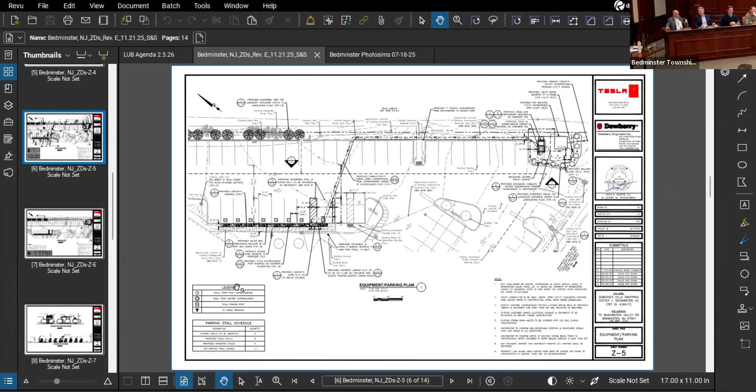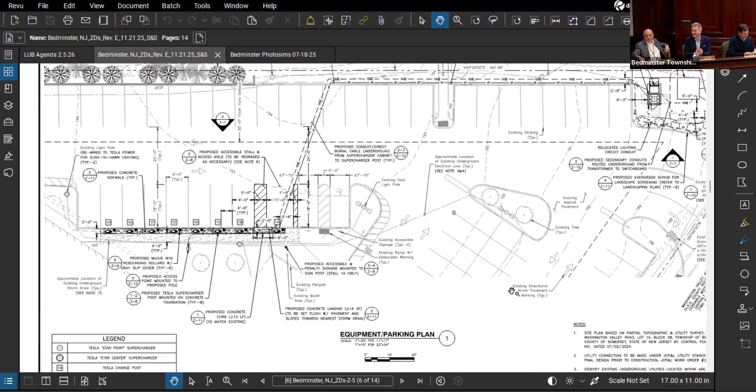So, as mentioned before, Tesla is proposing to install EV chargers and associated electrical equipment at 75. For those of us who forgot our paperwork - you didn't bring your homework. Well, you said you were gonna share with me now. Let those two guys share, I'll make Tim share with me. When you're giving documents, people, please remember where. Especially when you're giving them like a year ago, you're in the file somewhere.

So who's that building? Z5. C5. Yeah, that's exactly right here. We'll get some more, you can share the microphone with someone. No, it'll feedback, he just has to be on mute. So we did the other night, we had the same problem the other night. Chief, yes, and with Amanda. Could he type in? No, we're just gonna call him on a cell phone and put it next to a microphone so we can hear him if he speaks. Sorry about that, all right, go with it. Should we wait until he's on or keep on?

As part of this proposed installation, we will be adding 8 chargers, 1 supercharger cabinet, 1 1600 amp switchboard, and 1 utility transformer. This will be located at the eastern section of the existing lot. The existing site is a shopping center with an asphalt parking lot, and the chargers are proposed in an existing sidewalk area. The proposed cabinets will be in an existing landscaped area along the Knox Ave right-of-way. Additional landscaping will be proposed along the Knox Ave right-of-way to help screen the cabinets. Also, as part of this installation, 2 existing light poles will be modified to adjust their timing from dusk to dawn.

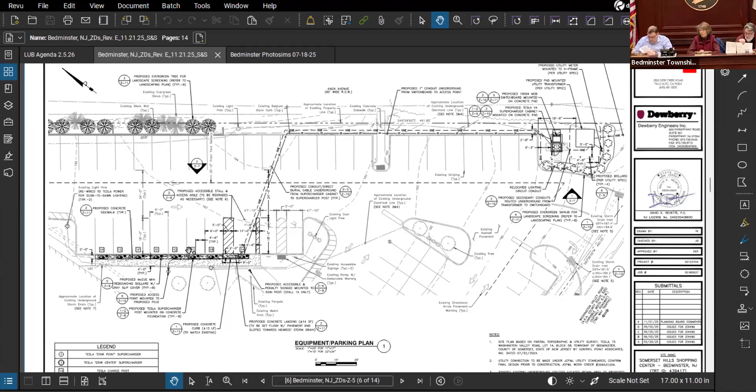Can you explain what additional lighting is going to be added in this area, if any? So there is not any additional lighting. The existing light poles that are there will be modified for their timing to run from dusk to dawn. They go out right now with us. Okay, we're at, to code.

And who would I talk to about any additional landscaping and stuff? Because the cars are going to back in, and on Knox Ave, that's all residential living. Yeah, that path is all residential there. So when they're backing in, the headlights are going to be straight ahead. Now, I know the headlights go off sometimes, unless someone's in there and puts the foot down. Is there going to be anything to prevent those headlights from being seen by those homes? Or do we think the wall's high enough right now? Have you looked into that?

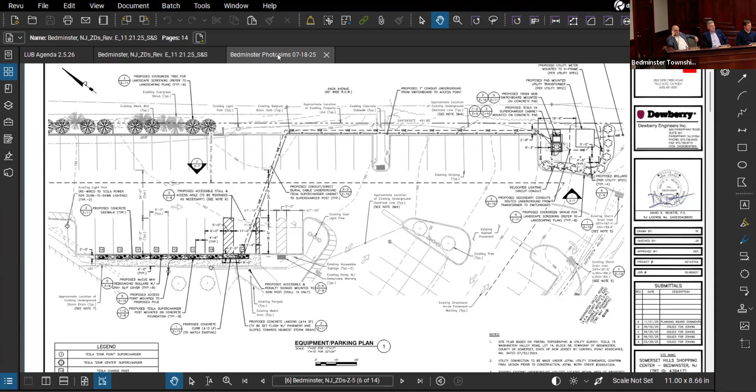Yes, so I'll pull up a photo simulation so you guys can see from when you're at the charger and looking at that wall, to get an idea of the landscaping. So this is our site plan, if you zoom in on part of our application. Yes, this was submitted. Is there any change since the exhibit was presented? No.

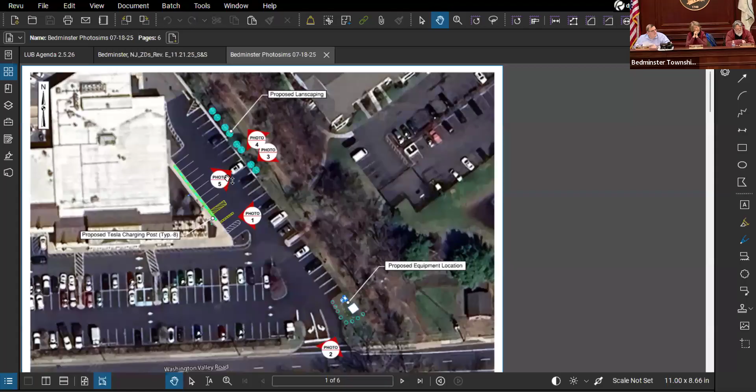So photo 5 would be the direction of your headlights, the way if you backed in and then you're facing Knox Ave. So I'll go to photo 5. This would be your view. So that's the existing retaining wall, and then you can see we're adding additional trees on the top side of that retaining wall. So as you can see right now, it is pretty dense. After you pass Knox Ave, there are additional trees before you even get to that residential area.

Now, will those trees be green all year long, or will they lose leaves? Will this be a shade, a buffer all year long? So the ones that we're planting will be year-round green, they're evergreens. The ones behind look like the ones that are going to lose leaves in the fall. Okay, all right, so it's a constant buffer. Okay, yes. Okay, could I ask a follow-on to that?

Was there any thought given to having the headlight issue point away, using the spaces where the car is right there, as opposed to the ones closer to the building? So it wouldn't necessarily make a huge difference, only because some cars have the charging port on the back and some have it on the front. So not every car would back in, some would pull forward. So if I'm on that side and you pull forward, you're still shooting that way.

I think Tim's point really is dense evergreens are the thing that's going to cut off the headlights. Usually when they're close, something 3 feet high will block headlights, where when the headlights are this far back, you're going to need something bigger to make a difference further away. But we'll work on that.

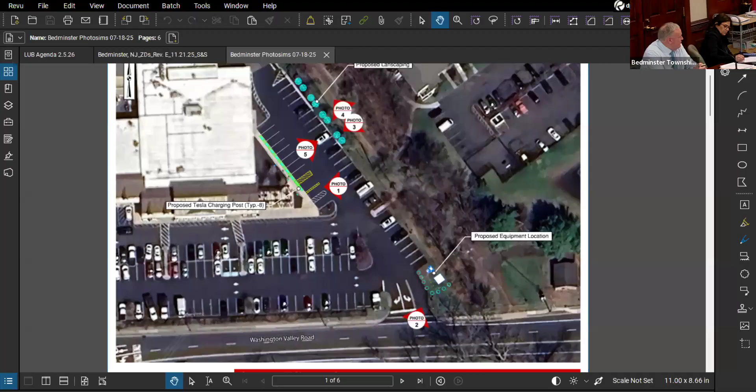I would just ask that if it gets approved, it be within a certain distance. Absolutely, or have one there, because when you go to these things they're loaded up a lot of the times, or even buying stuff with wrappers. When I was there, I thought it was fine with the existing trash that was there, but we have no issues putting another one. We can certainly add if needed, work with the owner, just something close by, because it does get messy.

Under the pergola, I'm pretty sure there was a trash can. Yeah, there probably is, it's just not showing. We're going to work with the owner, we'll take a look. If it's close enough under the pergola we'll keep it, if not we'll add one.

That's a good question. Do you ever put motion sensors for the lights so they kick on when somebody comes close, or are the lights just bright all night? Security lighting, that's all. You have two, they're the same level all night. Well, they're not on all night right now. They're supposed to be on all night.

Right, but do you ever consider having it so that when somebody drives up it kicks the sensor and then they come on? I would say our preference is just to have the lights on, because that way people feel safe driving in and getting out of the car and using the station.

So yeah, I think a potential issue there, George, is I understand what you're getting at, but anytime there's motion in the parking lot they will go on and off, and that can be at least as annoying as the lights on all the time. If you've got somebody there and they're in their car charging, the light goes off while they're in their car, and then they open the door and it comes back on.

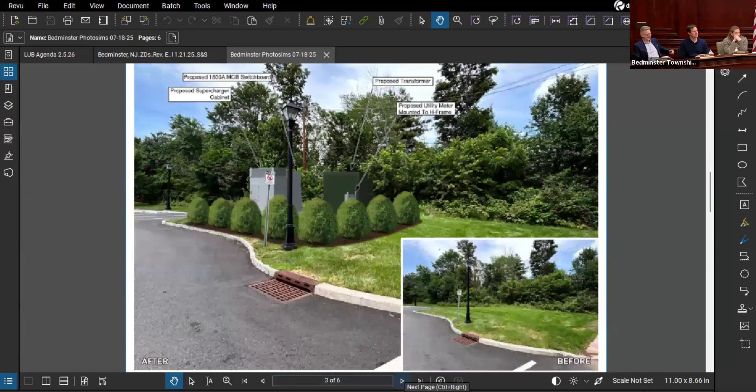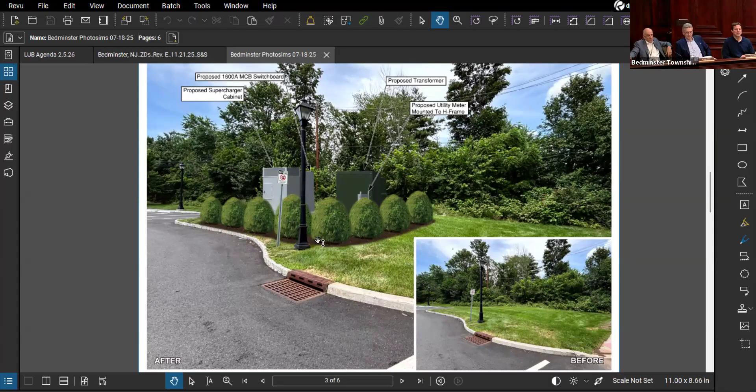So this is that equipment area, and these are the trees, shrubs, and there's also ornamental grass that would be in that area. So there'll be two enclosures there? How high are the cabinets themselves? They're about 6 to 7 feet tall. And they're white? Yes, the equipment's white.

Anybody else on the board? Okay, my last witness is our professional planner, Jim.

Jim, what do you want us to leave up here? All right Jim, just like Mr. Patel, we had you identified for the record, your address was given, but let's give the board a little snippet of your background, professional licenses, and any educational experience that you have.

Okay, I've been a professional planner licensed in New Jersey since 2001. I actually worked with Mr. Banish for 5 years, 25 years ago. I have a Bachelor of Science in Environmental Planning and Design from Rutgers, which I received in 1996. I've been practicing since that time, licensed since 2001.

I'm also a member of the American Institute of Certified Planners. I've appeared before over 300 boards in the state, including this one. I would recommend we accept it.

He will go on and on. Sounds like it may have questions. Oh, please do, I would enjoy it. About his experience, where he got trained, you mean? Maybe prior employment, I think is the issue. Yeah, I see. Prior, cute, very cute. All right, Jim, you've been accepted.

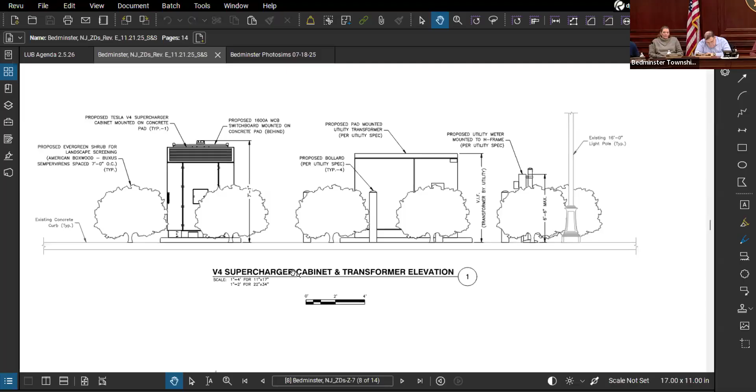We also need a bulk variance for an increase in impervious coverage. The improvements we're constructing increase impervious coverage by 0.14%. 40% is what's permitted in this district. Right now the site's at 86.6, and we will be at 86.74 after this installation. So there's a pad for the transformer, a pad for the cabinet, and in the area where we're putting the chargers in, we're going to expand that sidewalk closer to the building to make sure we have enough clearance for folks to walk through there.

There are 2 design waivers. The first is from 135-04.1E, that's to permit the lighting to be on for those 2 light fixtures after 11 o'clock. There's a second design waiver, wasn't noted in the professionals' reviews, but as I was going through the ordinance I caught it, so we're going to amend to request this. 135-01.4 does not allow accessory structures in a front yard, so that's in the design requirement. That would be another design waiver. It's similar to the bulk relief for the front yard setback, but I want to make sure we capture that as well.

As far as the 2 bulk variances, we'll talk about these under the C2 criteria, where purposes of the MLUL are promoted and the benefits outweigh any potential detriments from granting the relief. Here, the purposes promoted would be A, to promote the general welfare, and M, to promote the efficient use of land. Granting the relief here enables us to install these chargers.

If you've been out to the site, the parking lot on the wall is fairly close to that right of way. That was really one of the primary reasons we couldn't locate it on that side on the perimeter. The other thing is the grade change. In order to put the chargers on that side, we would have to shift the whole drive aisle to accommodate the 3 feet or so needed to fit the charging station, which would upset the configuration of circulation. Here in this location, we can push that sidewalk back, put the charging post behind the curb, and have a safe installation on that side.

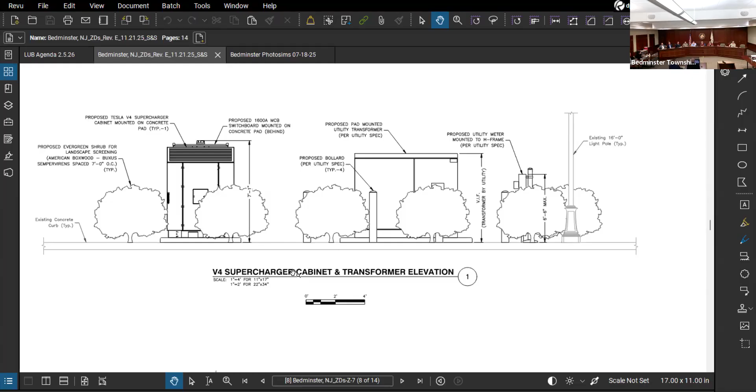As to purpose M, this is really taking an existing developed site and adding this amenity to it. We've located these facilities in what we think is the most sensible place on the site. As far as the location of the transformer and the charging cabinet, there wasn't enough ground area, and they're better off on the perimeter of the property as opposed to areas where people are circulating. So it seemed sensible to locate it there, and it's an efficient use of an existing developed site.

We have to show the negative criteria as well: no substantial impact to adjacent properties, and no substantial impairment to the intent and purpose of the zone plan. As far as impact to adjacent properties, as Mr. Patel said, the charging equipment is not a significant source of noise. The lighting associated with this, even what we're proposing to modify, meets all the requirements of the ordinance and shouldn't present any nuisance factors, glare, or anything like that.

The offset is that we're proposing additional landscaping, as shown in the photo simulation, at the top of the wall. The adjacent property has a residential structure on the opposite side of the path that, by my estimation, is a good 6 or 7 feet higher than this site. So there shouldn't be too much of an issue with visibility from that location, and supplementing evergreen landscaping along the top of the wall is going to help with that.

Likewise, for the equipment we're putting out by Washington Valley, if the board is comfortable, we'd work with either Mr. Banish or Mr. Ferraro to choose appropriate plants to screen that effectively. Evergreens would certainly be in order — I think we had boxwood on the plan now. So if it's okay with the board, we'd work with Mr. Banish to come up with a screening plan for the transformer pad, and also what we'll supplement across the top of the wall. That'll help reduce a lot of the visual impact of what we're proposing and mitigate the negative criteria on the variances.

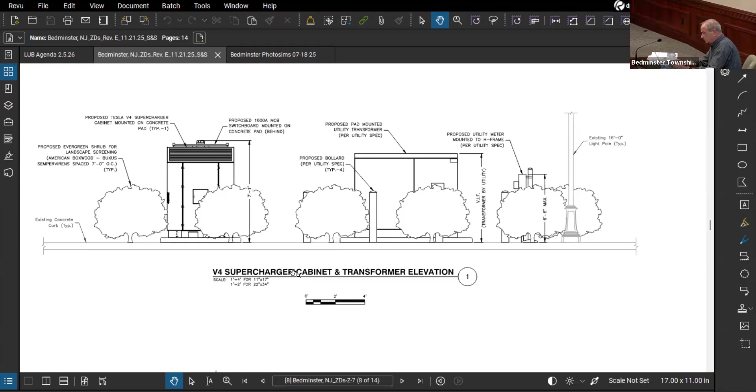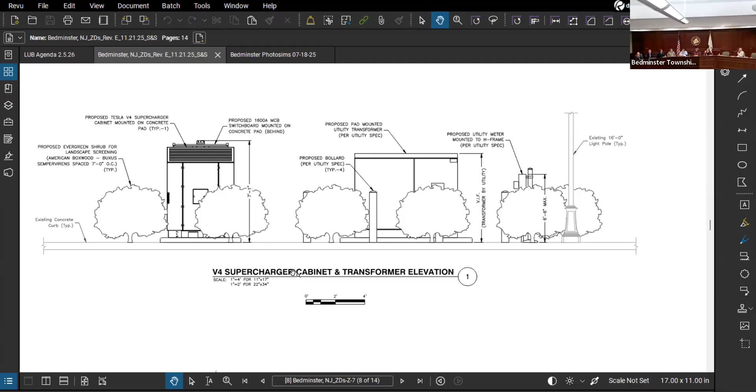You're not aware of any pollution associated with these chargers and the fans? The fans are for radiators, so the system gets hot and the fans just help the radiators dissipate the heat. So no, you're not aware of particulates, or any studies that have been done that measure elevated particulates in the air around these fans? I just want to be clear, you don't know of any studies like that? No. Okay, thank you, it's very interesting.

I have a question. If somebody utilizes the charging stations and wants to get a coffee at Dunkin' Donuts or go to one of the other pizzerias, are the lines going to be marked in terms of walkways and stop signs? How's that all going to go? These are going where existing parking spaces are on the site today, and there's a sidewalk that we're going to push a little farther from the curb so we have adequate clearance. So you'll be able to get out of your car, up onto the curb, and take a sidewalk all the way to the front of the store. Good, thank you.

Any other board member?

Look at the detail, this is just a small thing I noticed. The detail for the accessible station, do you need a ramp there to get up to the sidewalk, or is it showing it as a step? I'm just curious. We'll take a look. Yeah, I can answer that. I probably should have asked the site engineer.

Not a big deal, I'm just curious. There's no proposed ramp in that area. It's the ADA clearance on the side, so we just have a depressed curb to meet that. The plan shows an existing ramp with a detectable warning circle, right down where the existing spaces are, not where the ADA spot is. Correct, the existing ramp, somebody would be able to use that. They would get out and walk to the existing ramp if they needed to. Yeah, that's the intent.